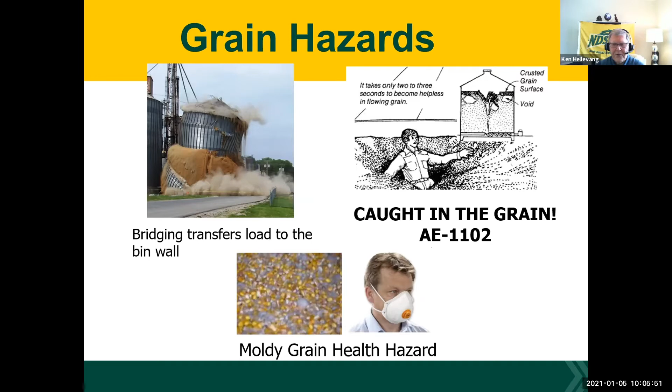In South Dakota, corn production is a major crop. It used to be that the moisture standard was 15.5% moisture. So people were really targeting trying to store that corn at 15.5% moisture. But if we look at this table, and let's just go to 70 degrees, come down to the 15%, and we have about 125 days. At 16%, only about 70 days of allowable storage time.

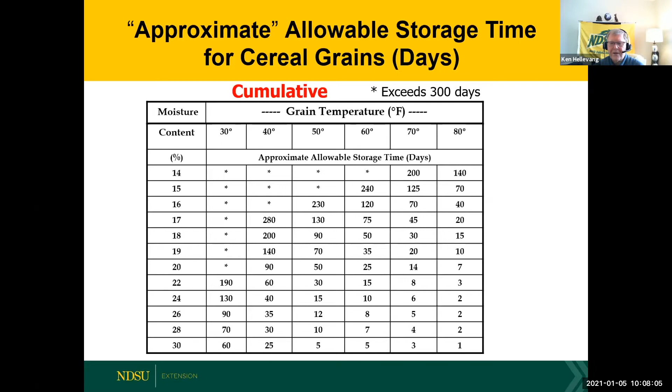But if we're thinking of storing them into the late spring and summer, we really need to be down to somewhere between 11 and 12%. And I'll show you a table that indicates we probably really need to be thinking of closer to 11. This table is an estimate that has been put together. It's not really based well on research. We at NDSU are doing some research now, and there's a couple other locations that are looking at trying to really establish the allowable storage time for soybeans when we include the oil portion of it.

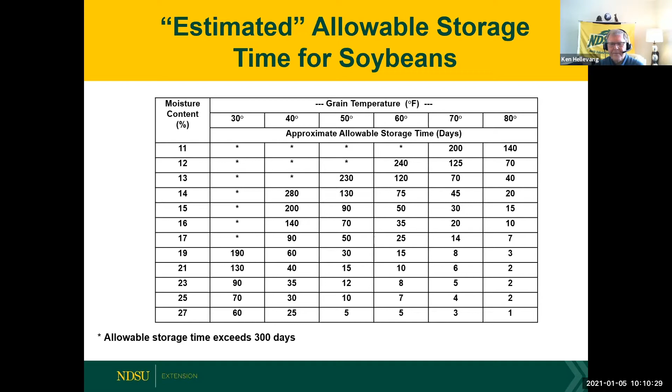And what we find is that the oil quality also is affected by temperature and moisture content. And so to maintain the oil quality, we really need to be down to somewhere in that 11 to 12% moisture if we're holding into the warmer months.

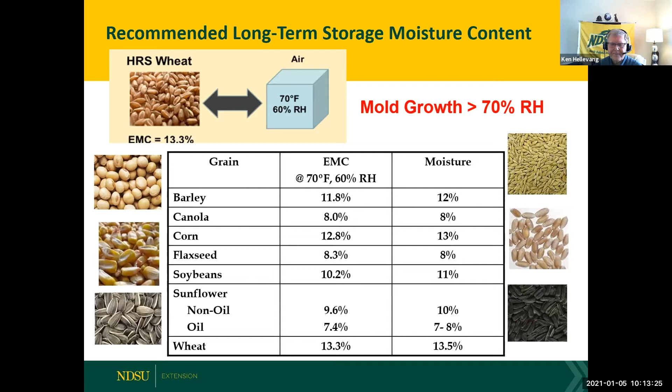So if moisture is so important, I think it's important to make sure that we're getting an accurate measurement of that moisture content. Most of the meters that we use, whether they're the electronic, more farm scale, or the higher priced, what you might see at the elevator, tend to be influenced by a variety of things. We need to adjust for temperature. These electronic units are impacted not only by grain moisture, but by temperature. Most of the meters today are automatically measuring the temperature and making that adjustment.

Some of the old ones, you had to go through and manually do that. But what we may forget is that they typically are going to have an accuracy window, you might say, of operating temperature. And for a lot of our meters, if the grain temperature is below 40 degrees, we're not going to get an accurate reading. I'm only aware of probably one or maybe two meters that can take us down below 32 degrees. And so really look at the moisture meter or tester that you're using and make sure that the grain temperature is within that operating range.

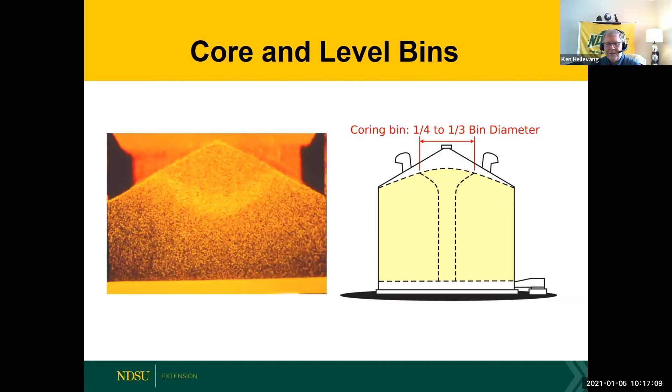Another management practice that I think most farmers today are aware of and use is that we don't want to be having a peak in the grain. That exposes a lot of surface area to being heated during warm temperatures. It tends to influence where the airflow goes with an aeration system. And then typically the majority of the fines and foreign material end up in that center core. And so recommended practice, and I think what a lot of people will do today, is fill that bin to the peak during harvest and then take out a few loads to core that bin and to level that bin. That I think is a huge factor in successfully storing grain. I talked to many farmers who say that they had problems until they started coring their bins.

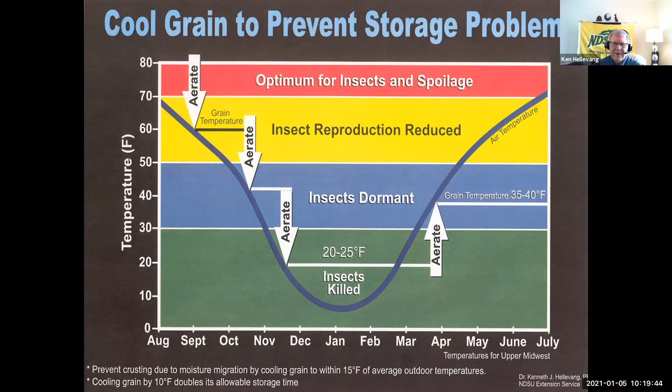Years and years ago, the recommendation used to be you cool the grain in the winter and you warm the grain in the summer. And that has not been a recommended practice for, like I said, a long time. But you still see that showing up in some of the guidelines that are out there.

So in our northern climate, I say that there's really no reason why we should have insect infestations in our stored grain until we get into the next summer. Just by controlling the temperature, we can control the insects.

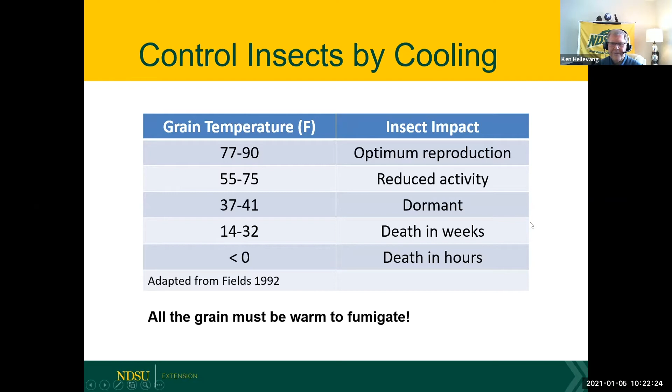There's a fairly simple formula that we can use to determine how long it's going to take to run an aeration cycle through the bin. The temperature change will start at the bottom if we're pushing the air and gradually move its way on up through to the top. And we can estimate how long that will be by taking the number 15 and dividing it by whatever the airflow rate is. A very common airflow rate is 2/10 of a cubic foot per minute per bushel. And at that airflow rate, we can cool that bin in 75 hours, or roughly 3 days. And it doesn't take a huge fan to do that.

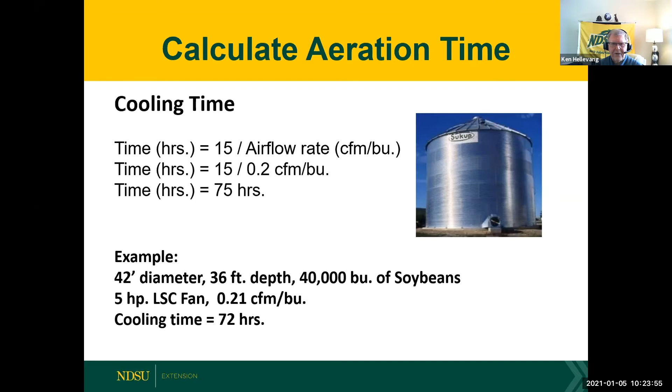As an example, I've listed a 42-foot diameter bin, 36 feet deep, that'll hold 40,000 bushels of soybeans. Just a 5-horse low-speed centrifugal fan would give us that 2/10 of a CFM per bushel airflow that we need, and we would cool that whole bin in 3 days. And so we're not talking, even on a pretty good sized farm bin, needing a huge fan in order to control insects and mold by controlling the temperature.

I put this visual together just a few years ago to remind people what's taking place when we're running that aeration fan. We have at the bottom what I call a buffer zone. Temperatures are going to vary during the daytime. So we might typically see a 20-25 degree temperature difference between low and high. During the cooling period, we're going to end up with temperatures that are approaching that cold temperature. But then when we have warmer temperatures going through, it'll start warming that cold grain, but in doing so, cool off the air. So what that grain mass really ends up seeing is something close to the average temperature.

Now, if we get a huge weather change when we're running the aeration fan during that 3 days, then of course we're going to see a change in temperatures within that bin. But typically we're going to end up with the grain temperature being fairly close to the average temperature when we're running those aeration fans.

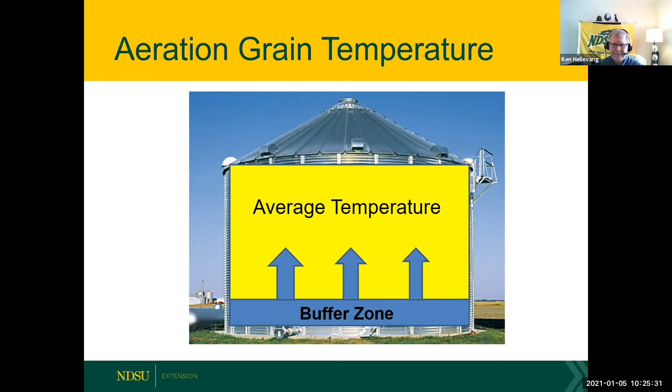This is a slide that I've used for many years with some modification to make it more current with today's bin sizes. But sometimes I think people forget just how economical running an aeration system might be. Again, I use a 42-foot diameter bin, 26 feet deep with corn. That puts us just under 29,000 bushels. We use an airflow rate of 0.2 of a CFM per bushel. Just a 3 horsepower fan will provide the airflow that we need through that 26 feet of corn.

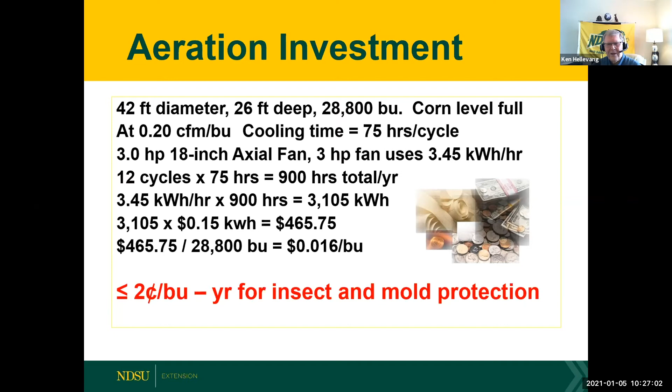Even if we were to run the aeration cycle 12 times, and we were looking at electricity at a cost of 15 cents per kilowatt hour, that is less than 2 cents per bushel for the whole year to control insects and mold. And I always say that you're not going to find a better insurance policy than what we see here. For just a minimal cost per bushel, we will have all kinds of benefits.

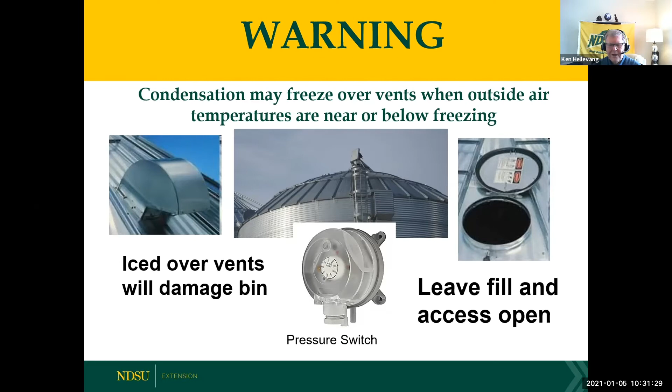To prevent damaging the bin, I really recommend when we're running the fan at temperatures near or below freezing to leave the fill hole and the access door open as kind of a pressure relief valve. There are pressure switches that could be installed within the bin and wired into the electrical circuit. I don't see them used very much. So as the fail-safe method, you might say, when we're running those fans at those colder temperatures, let's leave the fill and access door open.

I strongly recommend covering the fans when we're not running the fans. The little gopher there in that top picture was very busy carrying all kinds of debris into the aeration ductwork in this bin when I took the picture. Probably that's not as important as some of the snow and other things that might blow into an open fan. If we leave the fan open when it's foggy or when there's drifting, that air is going to be going into the bin, and many reports are of the only spoiled grain in the bin is on the bin floor. And I think it's because of those kinds of scenarios that we have that kind of problem.

The other thing is that in the spring, if we have warm, moist air outside and we don't have those fans covered, we get a 20, 30 mile an hour wind blowing into that open fan. We're aerating the grain and we'll warm that grain typically to the daily maximum temperature. And so it's really critical from a storage standpoint that we get those fans covered when we're not operating them.

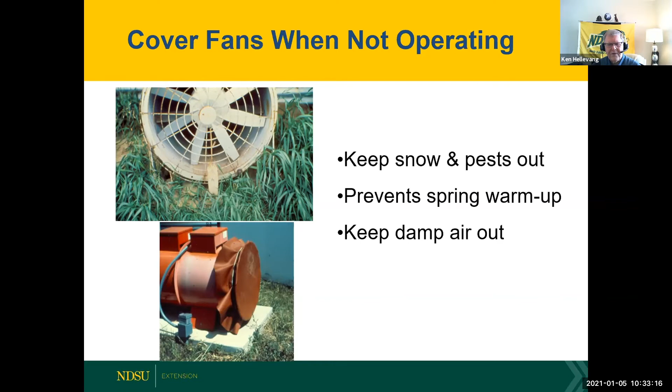As we start looking forward to spring conditions, we're going to start seeing more and more solar radiation hitting that bin. And what I've shown here is the amount of solar radiation hitting a bin on February 21 and June 21. If we look at the south wall on February 21, we have 1,725 BTUs of heat energy hitting that bin during a day. If we compare that to June, we've got less than half as much heat energy hitting that south wall. Now that of course is due to the solar angle, but it also is going to be warming the grain next to the bin wall. It won't go in more than a couple feet, but it is adding heat to our stored grain.

Same thing is true when we look at the bin roof, 1,800 BTUs on a bin roof, where in comparison to summer, of course, it's going to be higher because of the higher solar angle. So I think we need to consider that in addition to whatever the outside temperature is. So when we look at March, and again, these are North Dakota numbers, they'll be a couple degrees different for South Dakota. We're looking at temperatures of 25 degrees. So we can maybe run the fan in March just to start doing some of that cooling. April, average outdoor temperature 41. But if we look at nighttime, we're down to 29 degrees. So again, as we start looking at later into the spring, we may need to be selective of when we're running that fan to help cool that grain or keep it cool.

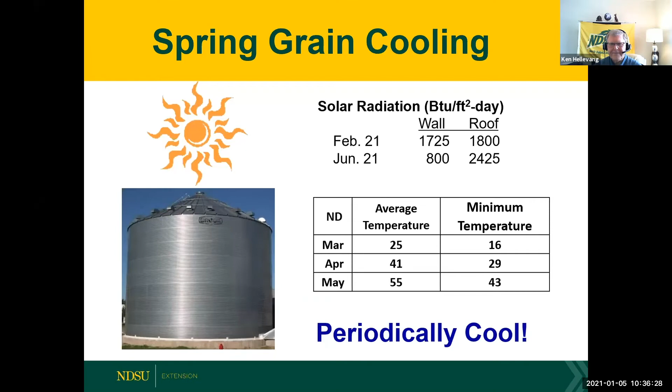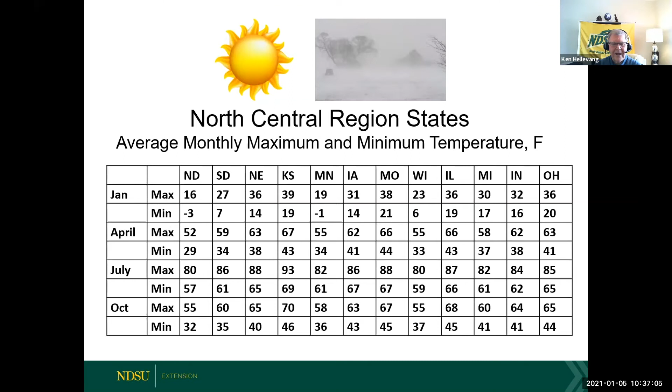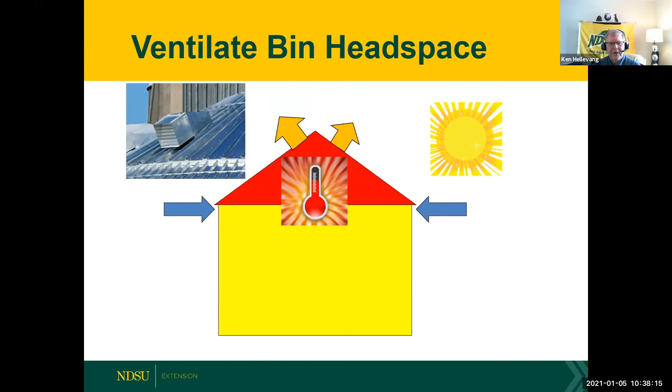As we start looking at summer storage, I think we really need to be focusing on ventilating the headspace. When we think of all of the solar heat gain up there, it's going to be warming that grain on the top of the bin if we allow that heat to sit in the top of the bin. So I'm really encouraging people to either have a bin where we vent that headspace just like we would an attic on a house, where we have air coming in at the eave and out at the peak so that we get the natural convection buoyancy carrying that heat out. Or more and more we're seeing, particularly in some of the bigger bins, where we're installing fans on the bin roof to actually ventilate that headspace. And that's what's shown in the little picture in the upper left corner.

Another strategy that I think we need to be thinking about for summer storage is that regardless of how much effort we put into ventilating the headspace, we are going to see the top warming up. In this little sketch that I've got, I'm showing 40-degree grain in the lower part, but we've got a layer at 70 degrees at the top. If we are using that 2/10 of a CFM per bushel and we only want to cool about 3 feet of that 20-foot grain depth, we would need to run the fan about 11 hours. So what I'm recommending is maybe every 3 weeks or so, monitor, know what the temperature profile is, run the fan for a few hours at sunrise on a couple mornings to utilize the cool grain that we have to cool down that top surface.

Don't run the fan any more than we need to because we don't want to add any more heat to the bottom of the bin than is necessary, but we can utilize some of that cool grain to cool down that top surface. A lot of times I start getting reports of insects in July, and I think some of that could be reduced by running the fans periodically end of June and into July to keep that surface cool.

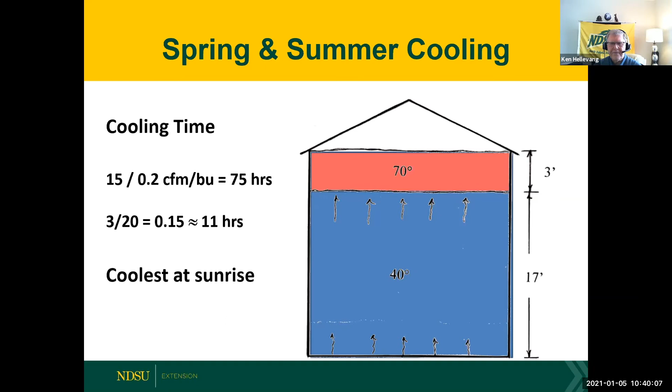We've always talked about managing the grain, and I added this little definition up there a couple years back to include that we need to have some skill involved. We need to understand some of the things that I'm covering in this presentation if we're going to manage that bin correctly. Each year is going to be different, and so understanding the fundamentals allows us to then manage the grain the way we would want it managed.

We need to be monitoring that storage, and typically we're looking at temperature, moisture, looking for insects, any mold that might be growing. We need to be checking, I think, at least every 2 weeks until we have it cooled down for winter storage. During the coldest part of the winter, probably 2 to 3 weeks, and I'm guessing even 3 to 4 weeks may work, as long as we have cool grain starting that winter. But as things start warming up again in the spring, I think we need to be thinking of back to about every 2 weeks.

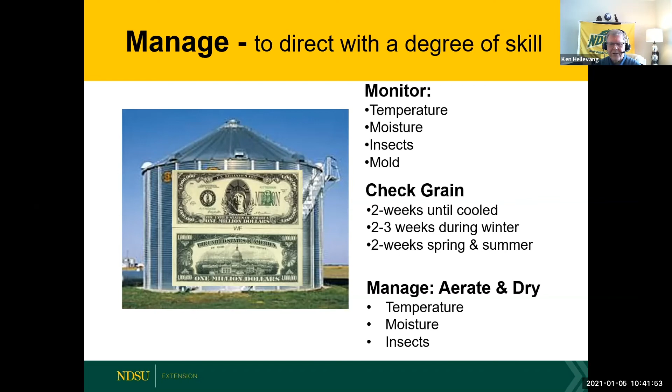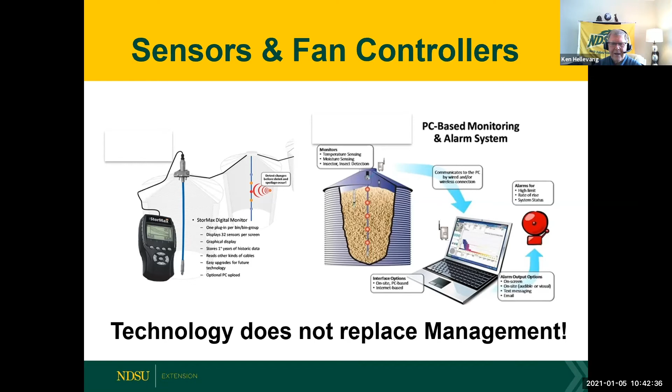And what we're doing is managing that grain by our aeration system. We may need to do some drying, we may need to do some other things, but if we're managing temperature and moisture, we can typically control the other problems that might surface. There are a number of tools available to help us with managing the grain. Everything from manual units that you plug in and measure temperatures to automatic systems that send the signal back to your computer and will trigger alarms. And I just caution that technology does not replace management. It's a tool that we can use, but it does not replace still checking on the grain and monitoring what's taking place.

One of the reasons why I don't totally trust the systems that are available is that grain is an excellent insulator. And so you get an insulation value of roughly R-1 per inch. So you get 2 feet away from a temperature sensor, and you have an R-24 isolating that area from the sensor. And so it used to be that we would see a picture kind of like what's on the right side of our slide. And I've put a big X through it because there's no way that it's really telling you the whole picture. We're doing spot checking in the bin, which tells us a lot.

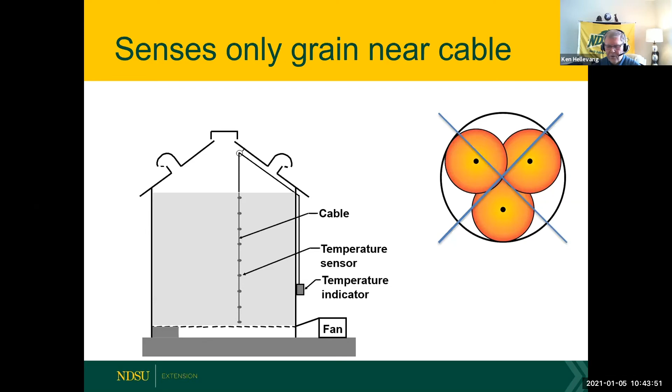There's no way we would know what's taking place down within that grain mass if we didn't have the temperature sensors in there. But they don't tell us the whole story. And so again, use them as a tool.

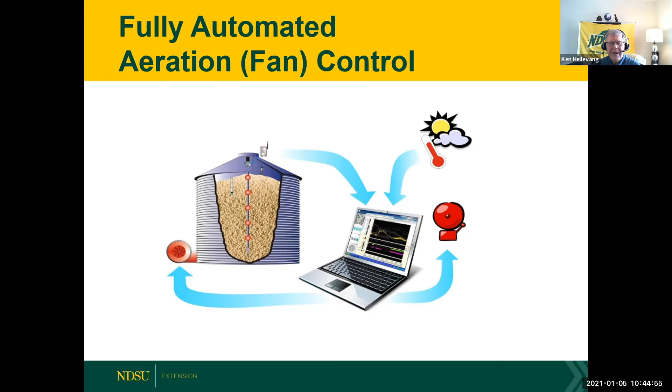We have fully automated systems that will measure outside temperatures. They'll measure inside temperatures, make the decision to run the fan, and those will work. But again, with the same caveat that I labeled before, they don't replace your management. They're a tool that will help select when the fan is running, and it can do that. Years ago, we used to just wire up humidistats and thermostats and accomplish many of the same things. Today's technology is much more sophisticated, and it's a tool that I encourage people to use, but it's no better than doing it manually as long as we're doing the appropriate management that goes along with it.

A relatively new thing for grain storage management is carbon dioxide. Carbon dioxide is the byproduct, of course, of insect activity, and it's also a byproduct of any spoilage or mold growth that might be occurring. So a number of years ago, we started researching and looking at, can we get an indication of what's going on in the bin by monitoring what the carbon dioxide level is. Typical concentrations outside are 350 to 400. I've measured 450 pretty routinely as well. But it's something in that roughly 400 parts per million range.

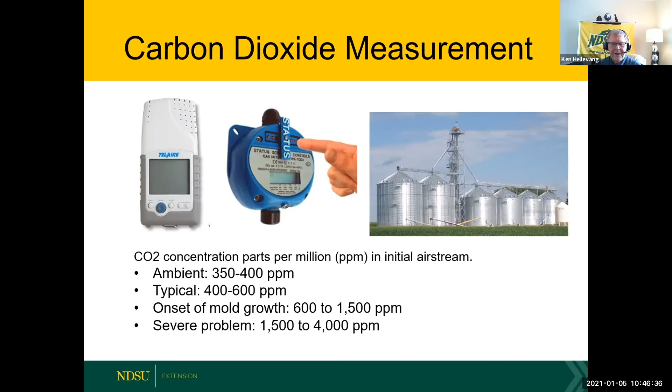If we start getting a mold problem or an insect problem, we're going to see the amount of carbon dioxide go up. And kind of a target that we've listed is that when you start getting up around 600 parts per million or higher, that's an indication that maybe there's a mold problem that is starting. You get above 1,500 and likely there's some very severe spoilage taking place. Again, a tool that I don't see used very much in this area, but I think is something that we'll be seeing more of in the future.

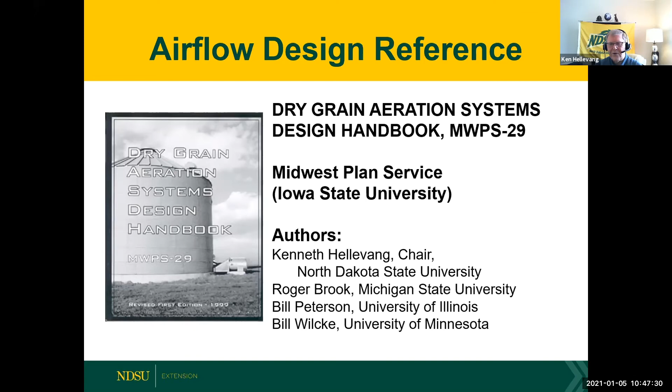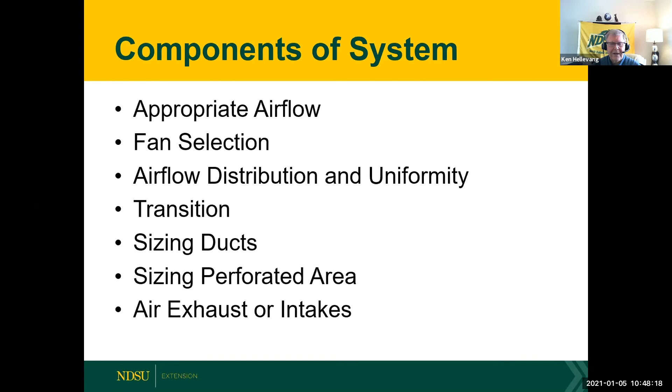So when we start looking at the design of an aeration system, I think it's important that we look at all the different aspects. Like they say, a weak link in a chain is going to cause us trouble. So we need the right airflow, we need the right fan, we need to think about the airflow distribution and uniformity throughout the grain mass. We need to think about and design the transition between the fan and the bin or ductwork. Sizing of the ductwork or the system is important. Sizing of the perforated area, and also the exhausts or intakes all have to be sized appropriately.

And I'm just going to walk through these very quickly, but some of the rules of thumb that we use for dry grain aeration, typically we're at about 0.2 of a CFM per bushel or less, depending on the cooling time that we're targeting. With wet grain holding, typically in the 0.2 to 0.5 CFM per bushel, and then natural air drying at least 0.75 to 1.25 CFM per bushel. A lot of times I hear aeration used as a term for all moving air through grain, and really each one needs to be designed and operated differently. And so I prefer, of course, the more accurate nomenclature.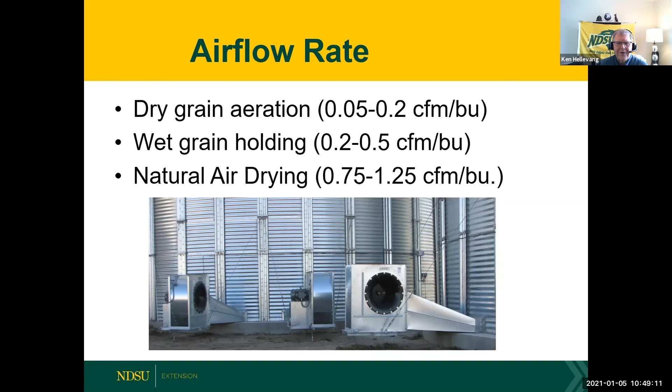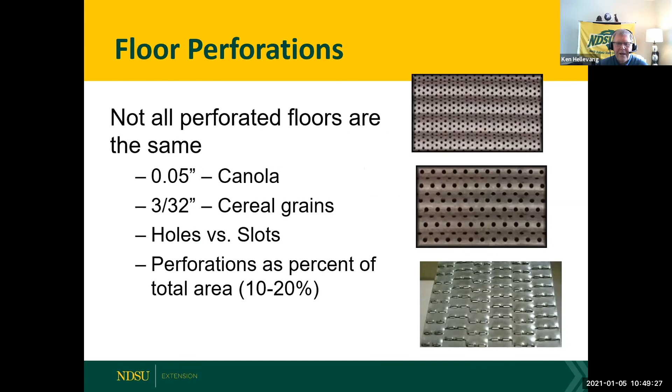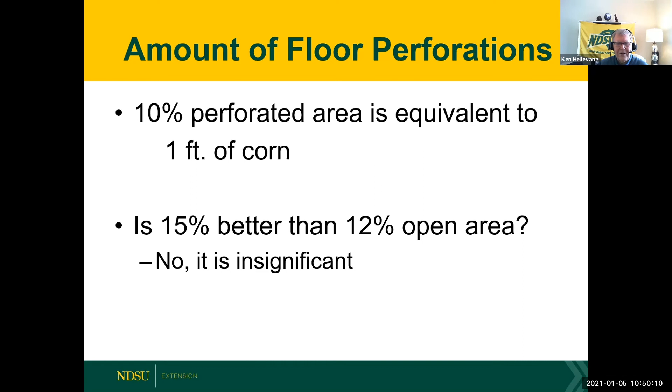Sizing of the perforations in the floor. They come in different sizes. They come with different options such as slotted floors. Really nothing magic about those. The question that I get a lot is, well, if one floor has 12% area and the other one has 15% perforated area, is that a better system? And no, the difference is insignificant. Way back when, they looked at the amount of perforated area in a floor and determined that a 10% perforated area is roughly equivalent to a foot of corn. And so we're talking a matter of inches of corn when we look at the differences between the floors that are available.

Same thing is true with vents on the bin roof. I hear a lot of questions about that. Rule of thumb is 1 square foot for every 1,000 to 1,200.

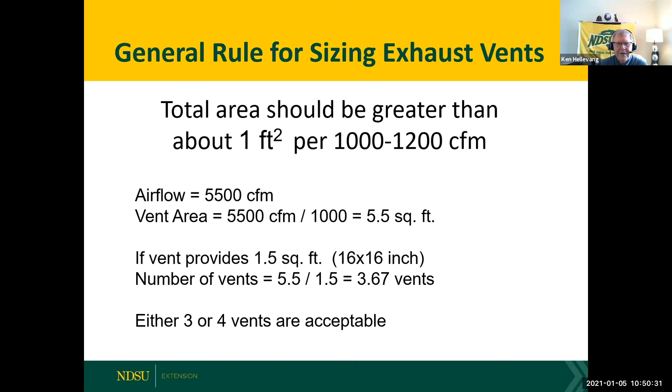And it really is sizing those vents. And I'm going to show you the picture on this next one. Some of these bins, I think they got vents growing out of them all over the place. And really, when we design the vents, what we're trying to do is reduce the amount of pressure or restriction that the air has as it leaves the bin. And if we're in that roughly 1,200 CFM range, that's going to be a very appropriate value.

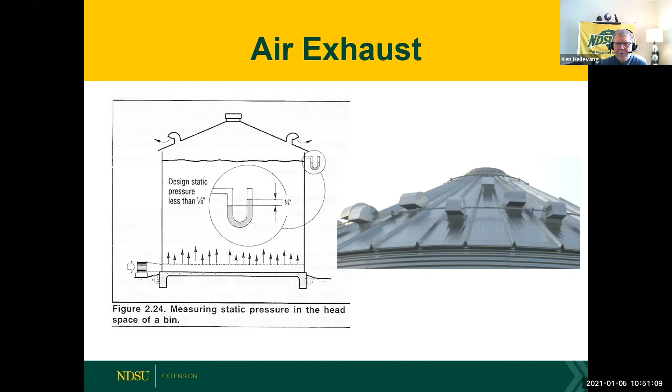Hopper bins, again, we need to think of the same criteria that we talked about before as far as sizing, uniformity. I've seen some systems out there that, it's amazing that they get any air through them. And so all the different aspects need to be looked at.